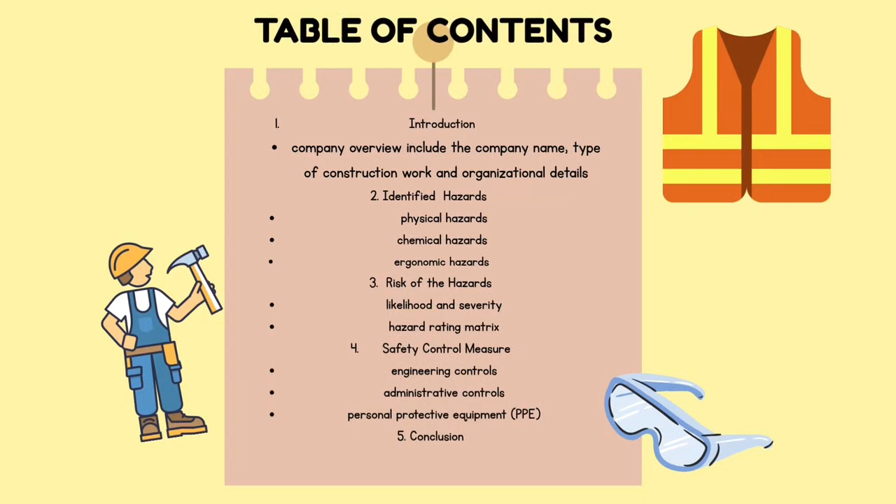Here, overview of Putra Perdana Construction Sdn Bhd. Putra Perdana Construction Sdn Bhd or PPC is a leading Malaysian building construction company established in 1986 and headquartered in Selangor. It operates as a key subsidiary of Putrajaya Perdana Bhd or PPB Group and has built a strong reputation for delivering high quality, sustainable and timely construction projects.

Over the years, PPC has successfully completed projects worth over RM 9 billion, ranging from luxury condominiums and office towers to government buildings and green certified developments. The company is known for pioneering environmentally friendly construction practices in Malaysia, often incorporating Green Building Index, which is GBI, standards into its projects. Its client base includes major property developers, private corporations, and public sector agencies.

PPC's key strengths lie in its expertise in fast-track and design and build construction, its use of modern technologies, and its strong commitment to occupational safety and health (OSH) compliance across all work sites. Hazard identification, specifically in the context of working at height on a construction site like Putra Perdana Construction.

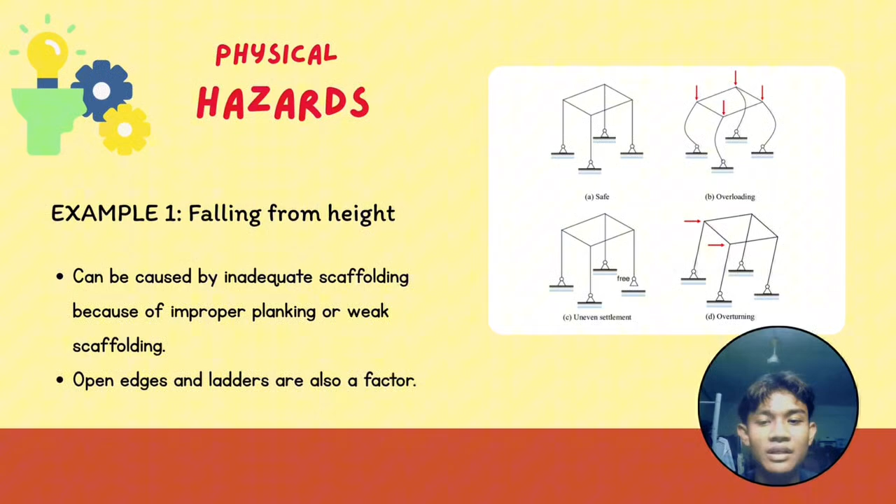Physical hazards. What are physical hazards? So, physical hazards are the most common on construction sites and pose immediate safety risk. Example 1 is falling from height. This occurs when workers perform tasks on scaffolding or elevated platforms without proper fall protection. It remains the leading cause of injuries and fatalities in the construction industry. Open edges and ladders are also a factor in causing falling from height hazard.

For example 2, 3, and 4, we have falling objects. Falling objects are basically tools or materials falling from above and striking workers below. Objects like tools or materials, especially dangerous ones, can pose a risk for workers that are not wearing helmets or if materials are not properly secured.

The next one, electric shock. Electric shock is basically any overhead power lines, exposed wirings that can cause electric shock hazard. Workers may come into contact with exposed live wires or faulty equipment, especially when working near temporary wiring or metal scaffolds. This can lead to severe burns or fatal shocks. It can also cause fire on buildings, basically.

The next one, inadequate lighting. Inadequate lighting means poor lighting conditions, particularly in enclosed space or during early and late hours. It can result in missteps or incorrect handling of tools and materials.

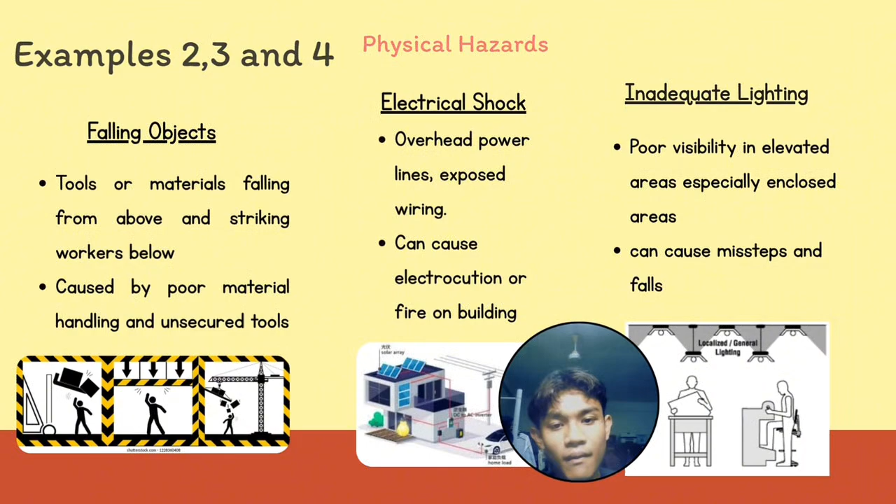Chemical hazard may not be as harmful or immediately visible in the start, but it can be just as harmful as other categories. The only example that can be found by us conducting research here is silica and dust exposure. Activities like grinding, cutting, or drilling can generate dust, including silica, which can be inhaled. Long-term exposure may lead to respiratory disease such as silicosis or chronic bronchitis.

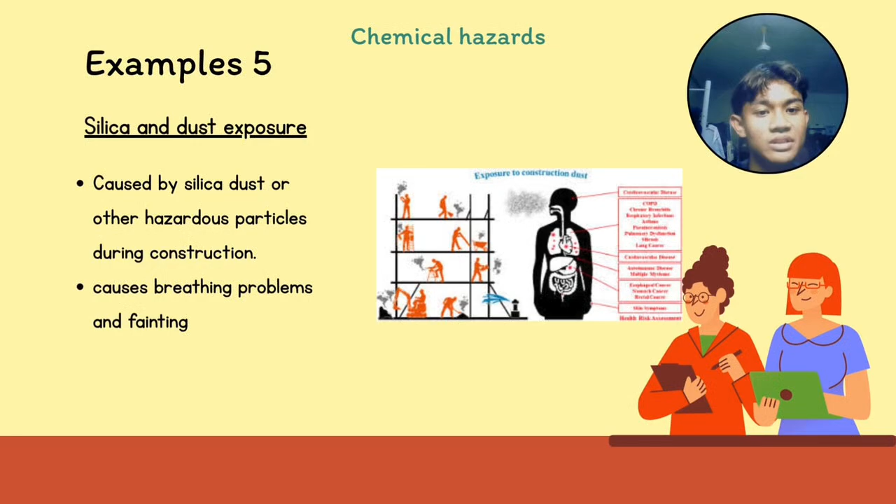Last but not least, we have ergonomic hazard, which affects the way the body interacts with tools, equipment, and protective gears. So for this, we only have one example, which is lack of PPE. Lack of PPE basically just means wearing ill-fitting or missing personal protective equipment. Without proper helmets, gloves, harnesses, or boots, workers are exposed to both discomfort and injury, especially during extended tasks or in high-risk zones. Example of this is a worker on a boom lift without a harness.

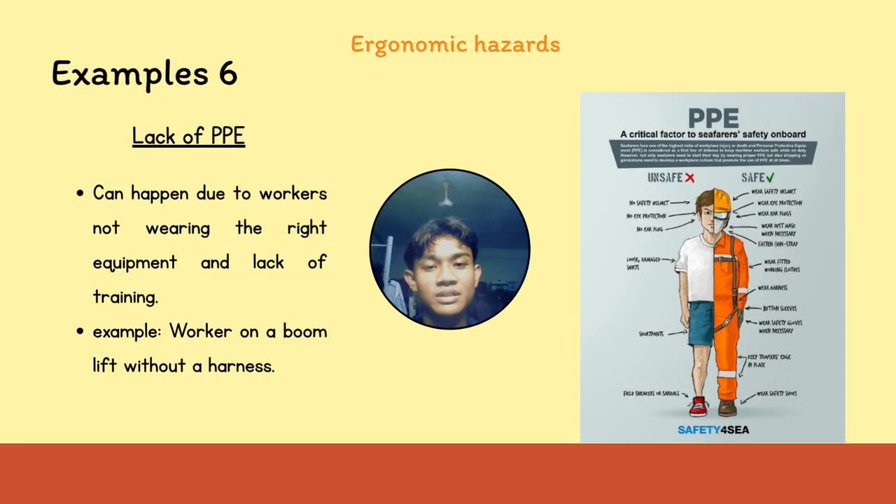Now, I will explain the risk component in the HIRARC process. In industrial safety, risk refers to the likelihood of a hazard causing harm and the severity of the outcome. For example, even a simple hazard like uneven ground can lead to serious injury if left uncontrolled. Let's look at common hazards and their associated risks at Putra Perdana construction sites.

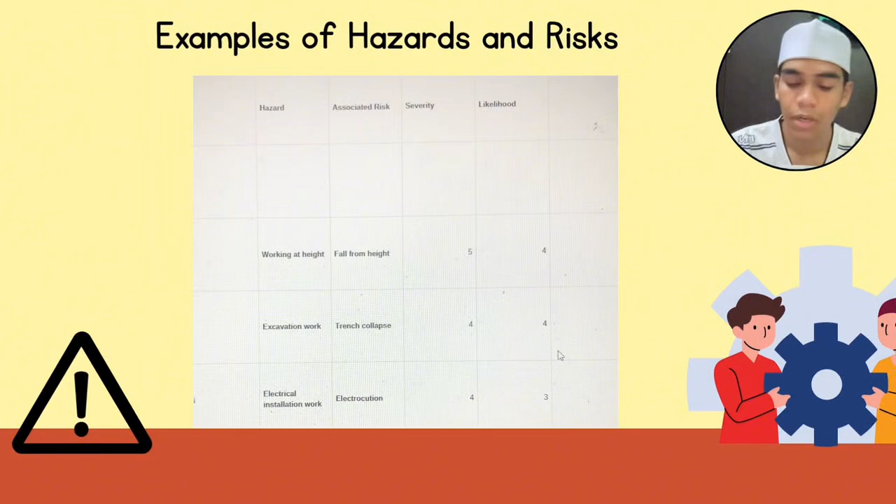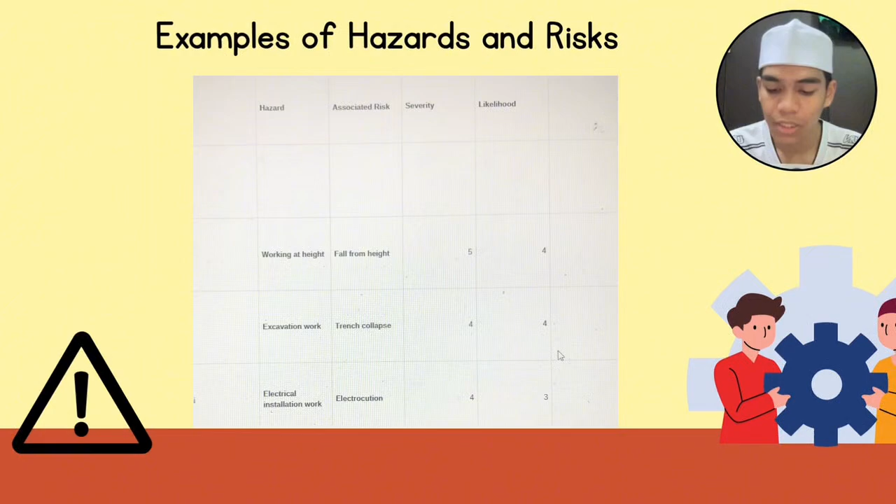Number 1. Working at height. This carries a high risk of falling, which could lead to serious injury or death. Number 2. Excavation work, which could lead to trench collapse, potentially trapping workers underground. Number 3. Electrical installation work, which risks electrocution from exposed wiring.

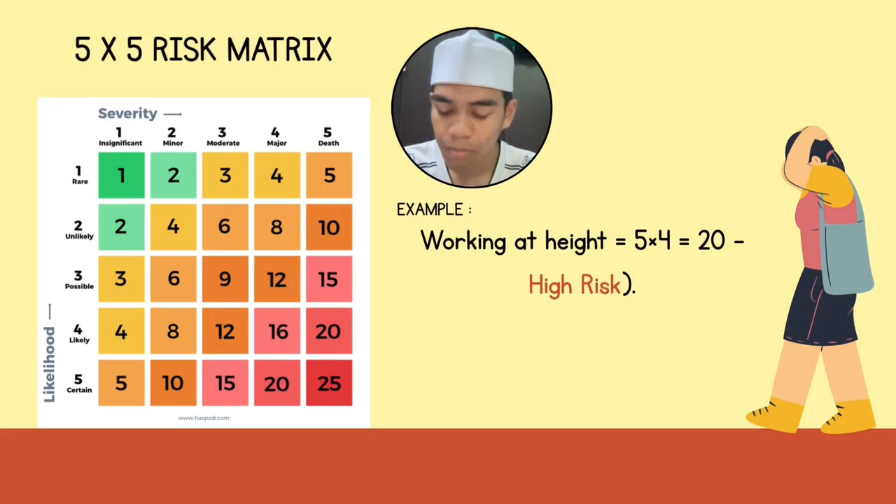For example, in a construction site activity like working at height, the severity is rated as 5 because a fall could cause death. The likelihood is rated as 4 because it's quite possible during scaffolding or tower work. So the calculation is 5 multiplied by 4 equals 20. This falls under the red zone, which means the risk is high and requires immediate control action. This matrix helps safety supervisors decide which hazards must be prioritized to protect workers on site.

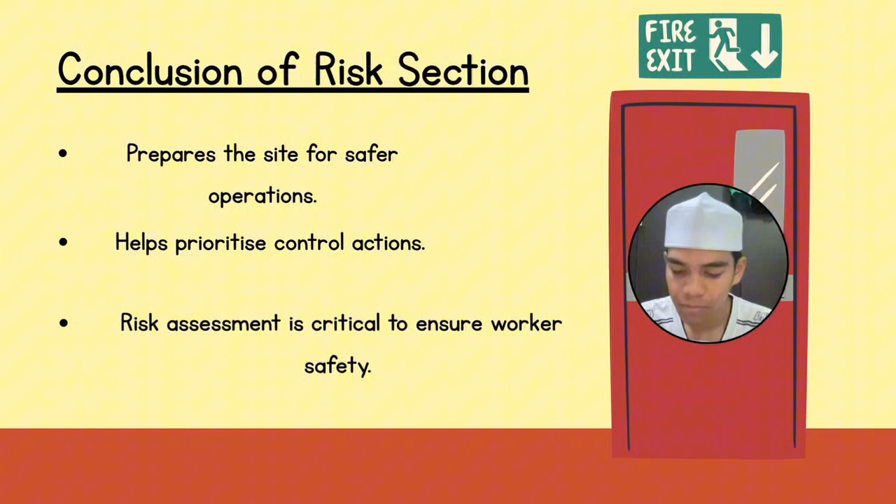To conclude this section, this assessment plays a vital role in ensuring a safe construction environment. Firstly, it prepares the site for safer operations by identifying and evaluating potential dangers before any work begins. Secondly, it helps prioritize control actions, meaning the most dangerous tasks will be managed first using proper safety measures. And most importantly, risk assessment is critical to ensure worker safety. It helps to prevent injuries, protect life, and support a strong safety culture at the workplace.

Hazard effect in construction sites. Construction sites are engines of progress, but also hot zones of hazard. Without proper safety, a small mistake can lead to big consequences.

Construction is risky by nature. Heavy machinery, heat, electricity, also sharp tools. Hazards don't just affect health, they can mess up budgets, timelines, and even lives. In this video, I focus on the effects when hazards are not handled right.

Hazards on a construction site can have health effects on workers. Firstly, physical injuries like fractures, burns, sprains, and cuts. Second is long-term illness like asthma, hearing loss, back pain, and skin disease. And third is mental stress like mental exhaustion, PTSD, and anxiety. But it doesn't just stop there.

The hazard doesn't just have health effects on workers, but also a financial impact, especially on the company, like medical costs, insurance claims, compensation payouts, and the project getting delayed. Hazards hit wallets hard. A single incident can lead to huge medical bills, liabilities, and lawsuits. The cost of prevention is always cheaper.

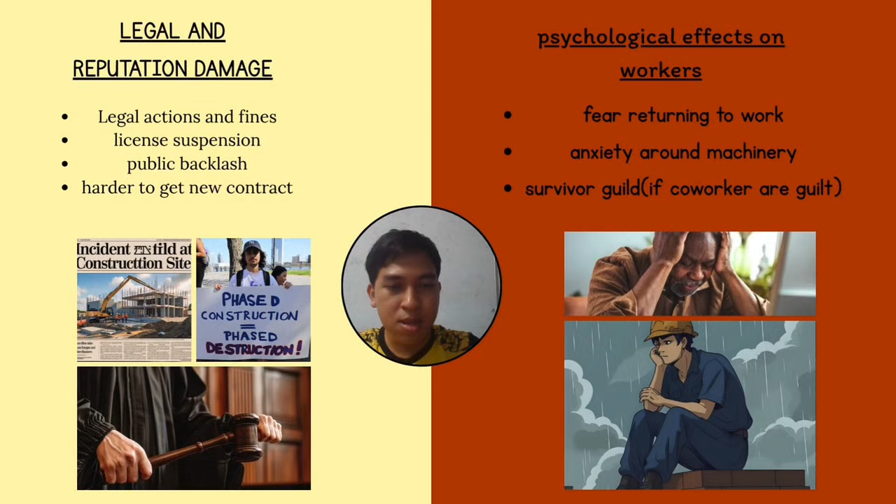And the fourth is a psychological effect on workers. The workers will feel fear of returning to work, anxiety around machinery, and survivor guilt if their coworkers are hurt.

The conclusion, the impact of hazards is real. First, hazards affect more than just physical health, they hit finances, time, morale, and reputation. Injuries lead to project delays, legal issues, and massive financial loss. And next, mental health effects like trauma and fear reduce worker productivity, and an unsafe environment damages a company's image and future contracts. Prevention through safety training and awareness is the best long-term solution.

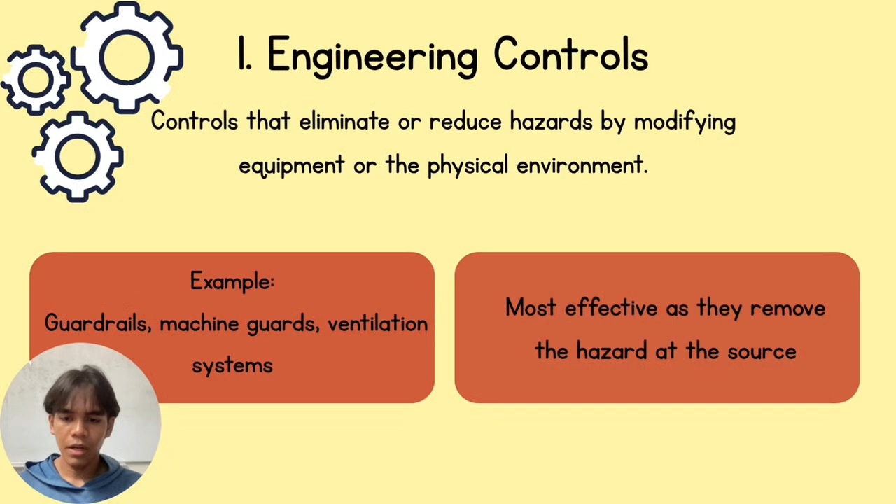Safety control measures are used to reduce risk at the construction site. These are engineering controls, administrative controls, and personal protective equipment or PPE. First, engineering controls are methods that eliminate or reduce hazards by changing the equipment or physical environment. For example, installing guardrails to prevent falls, using machine guards to avoid contact with moving parts, and providing proper ventilation to remove dust and toxic fumes. These are considered the most effective because they deal with the hazard directly at the source.

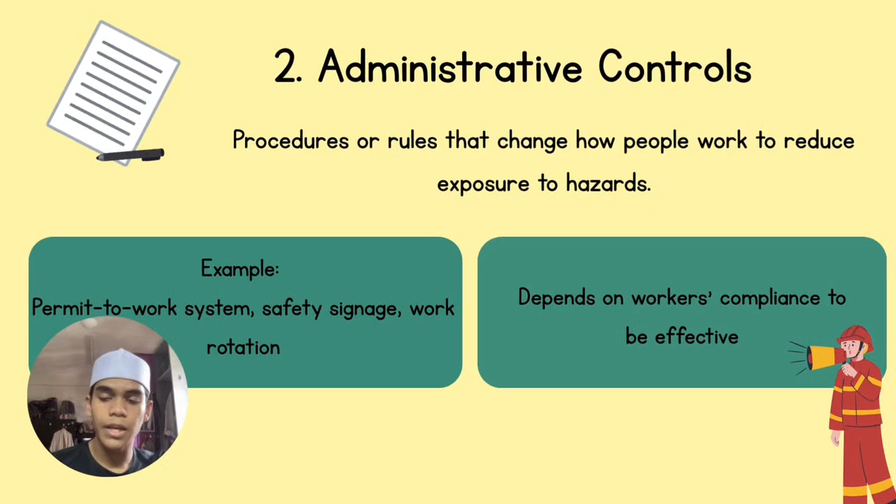Second, administrative control refers to procedures or work policies that reduce exposure to hazards by changing how tasks are performed. This includes implementing permit to work systems, posting warning signs, conducting safety briefings, and rotating workers to avoid fatigue. However, this control relies heavily on human behavior and compliance, so it is slightly less effective than engineering controls.

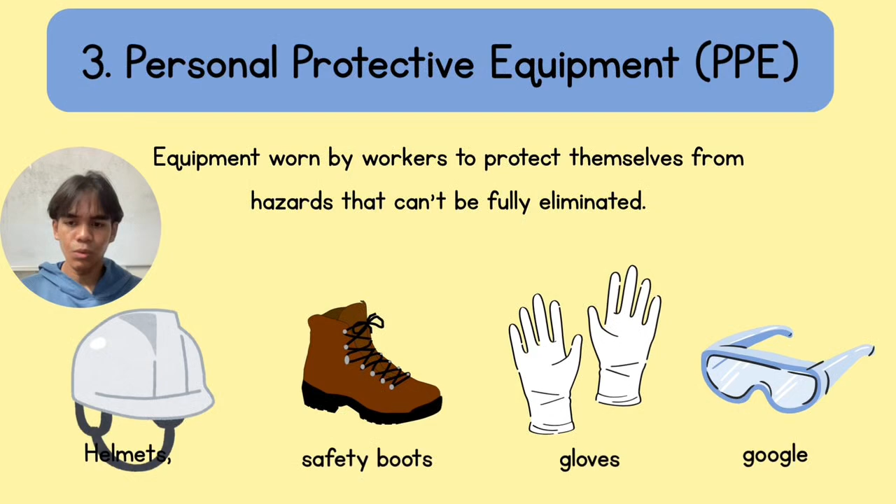Lastly, personal protective equipment or PPE is the equipment worn by workers to protect themselves from remaining hazards. This includes helmets, gloves, safety boots, goggles, and high visibility vests. PPE acts as the last line of defense when hazards cannot be completely eliminated through other controls. Workers must be trained to wear and use PPE properly for it to be effective.

I'm Iman and I'll be explaining the conclusion. To conclude this presentation, it is important to remember one key message, which is construction sites are high-risk environments. Hazards like falling from heights, electrical exposure, or inhaling harmful dust are not rare. They happen every day and their consequences can be devastating.

But the impact of these hazards doesn't just stop at physical injuries. When an accident happens, the effect ripples through everything. Workers suffer emotionally, families are affected, projects are delayed, the company loses money, and reputation is damaged. That's why control measures are not just safety features, they are life-saving strategies, where engineering controls reduce risk at the source. The administrative controls guide safe work practice. The PPE gives workers the protection they need when hazards can't be removed. Each of these plays a critical role, but they only work when they are used together and taken seriously.

At the heart of a safe construction site is one simple truth. Safety is everyone's responsibility. It doesn't just belong to the safety officer or the site supervisor. It belongs to every person who steps onto that work site. From management to workers, we must all stay alert, follow procedures, and protect one another. Because in the construction industry, one careless mistake could change a life forever.